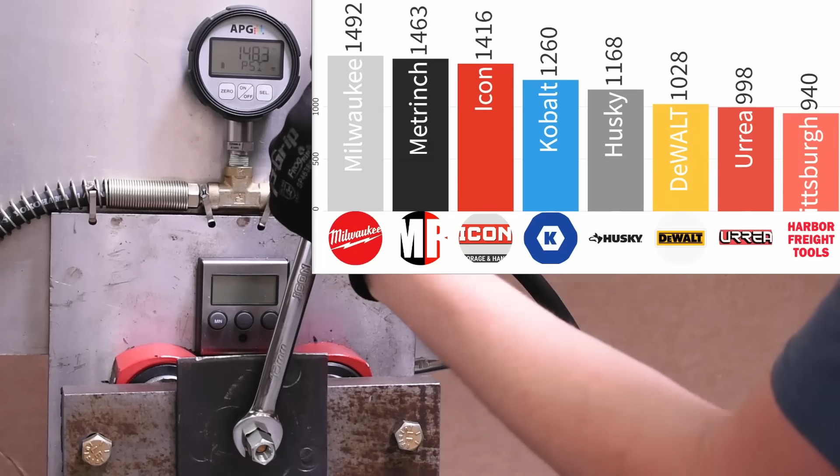Today we test 13 different brands of spanners from Europe versus combo wrenches from the US, from brands we haven't tested yet on the channel. Looking at the amount of grip they can do before slipping, how that performance compares to jaw thickness and hardness, and finally comparing those results against what we've measured from the likes of Snap-on, Harbor Freight Icon, Milwaukee, and more. Trigger warning: I'm not going to be pronouncing half these names correctly, so apologies ahead of time.

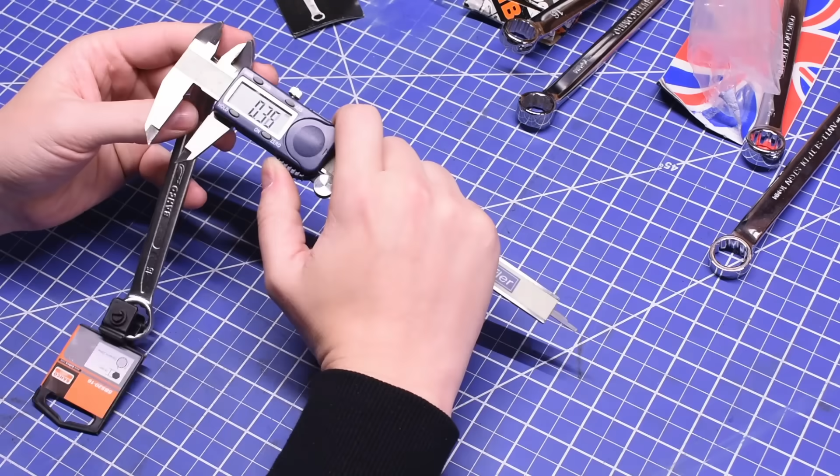In order of price, we found them for, but this likely changes based on the country you're buying in. We have the Bahco CM Set 10 combination wrench set, or spanner set, whichever your preference may be. This wrench comes in a 10-piece set for $75, so $7.50 a piece. Bahco is made in Sweden, and many say it's a cheaper way to buy Snap-on since they're part of the Snap-on umbrella, but this one's opening measures 0.18 millimeters over nominal, so not off to a Snap-on-like start there.

We currently test each wrench more than once in each wrench direction and show you its median result. And we use all new hardware for each test—nuts, washers, bolts, everything.

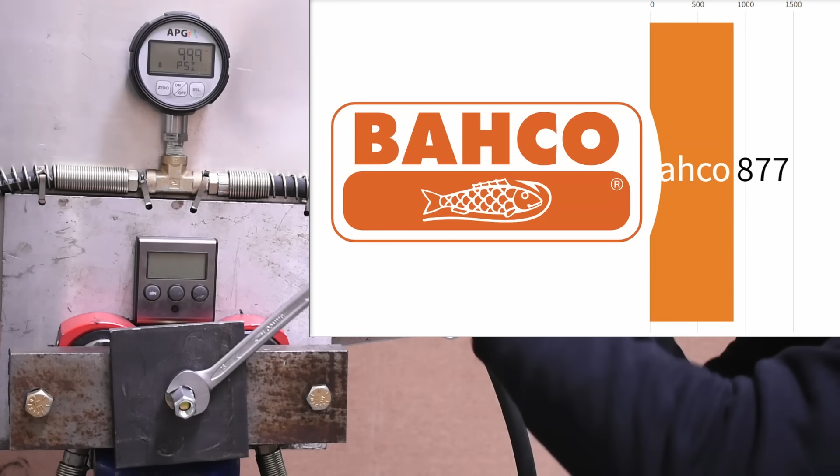This one's jaws measure 6.7 millimeters thick, which is about normal, and it slips and mars the fastener at about 1109 psi of bolt tension, which if you want to play along at home, you can convert to torque using the formula below.

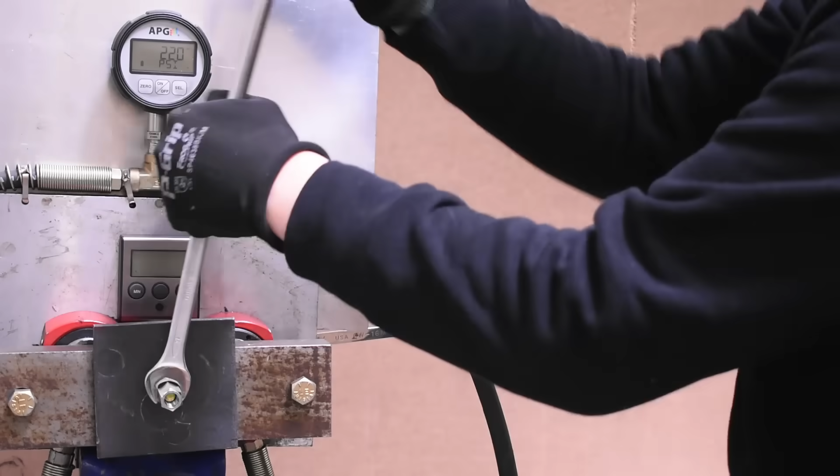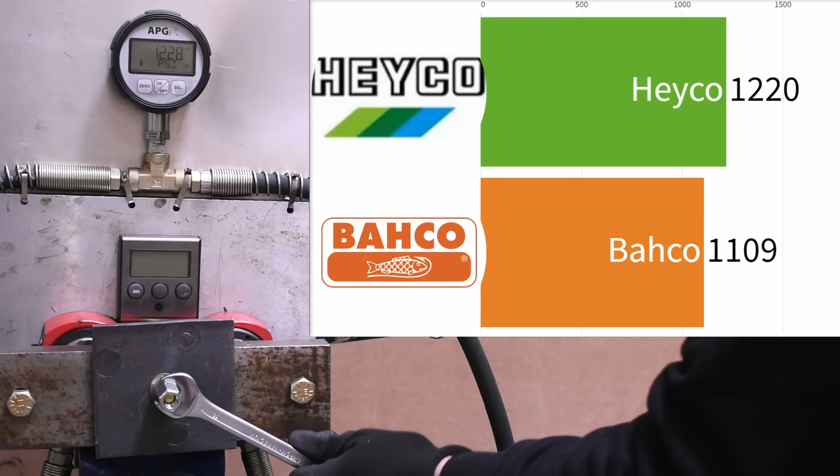Next up in price is the Heyco, the first in a line of German brands we have coming up. This one measures only 0.09 millimeters over what's stamped on the tool, which is a channel record, beating the 0.11 millimeters over of Snap-on. It's tight. But also slender, only 6.25 millimeters thick at the jaws, which we factor into scoring, but may make for a hard go at pumping up the PSI here. But it still passes the Bahco with 1220 nonetheless. Should do very nice in performance per jaw thickness, likely helped by that tight tolerance.

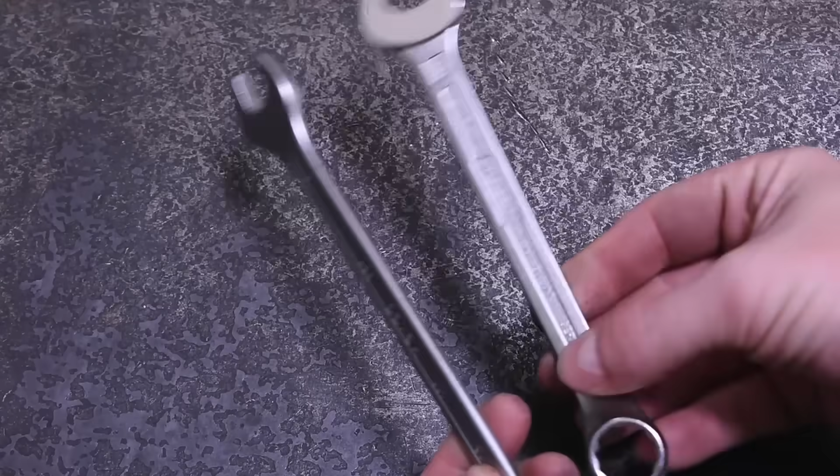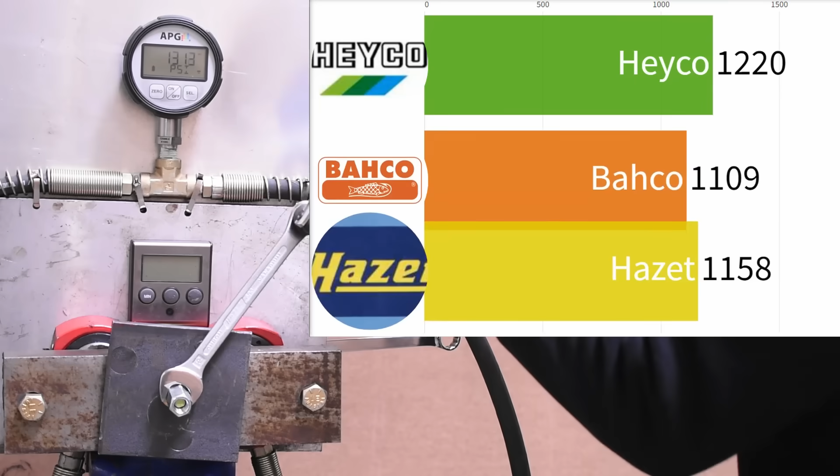Alright, and here we have the Hazet, jumping up from $9 to $10 a wrench now. The German brand Hazet looks very similar to the Heyco, but has this cool offset sort of boxed-in design. The Hazet measures 0.14 millimeters over, which is still quite good—we often see 18s and 20s, for example. Its jaw thickness is 6.5 millimeters, which is on the thin side, but has its benefits. That doesn't stop it from piling on the PSI nicely, and the Hazet reaches up to 1158 before slipping. Very nice.

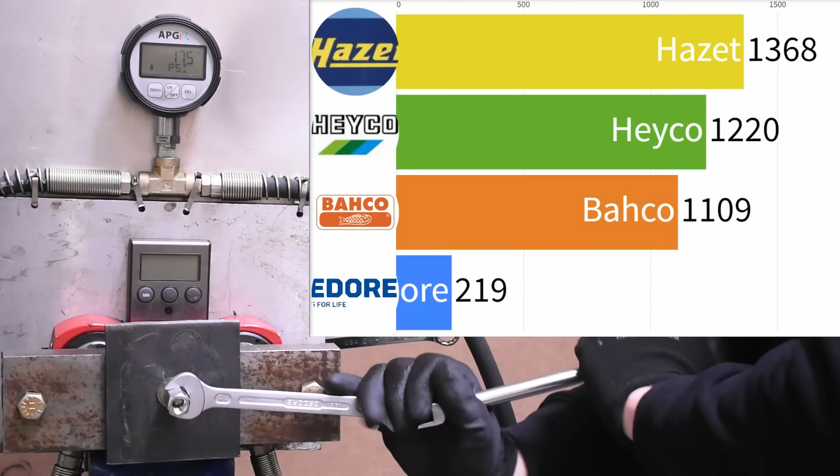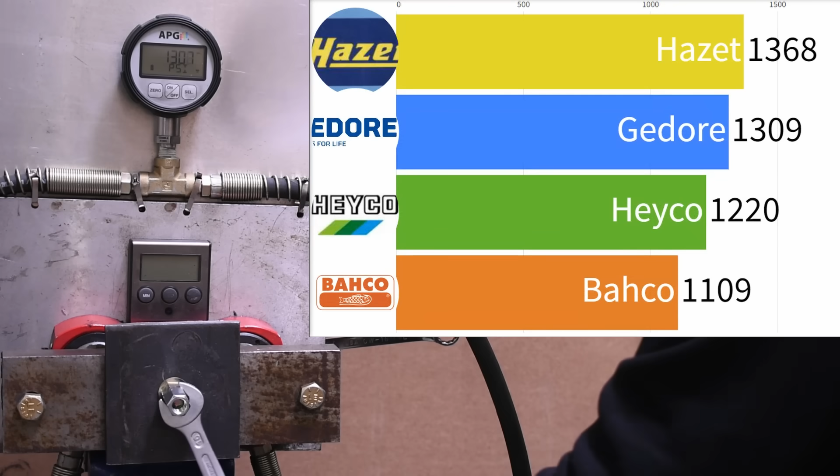And here we have the brand I'm going to call Gedore, another German example, $10.83 a wrench as found. This one's a true spanner, no box end, and rocks that seemingly popular over there sandblasted satin chrome finish. Also 0.14 millimeters over like the Hazet, but 6.3 millimeters thick, which again is on the quite narrow end of things. This one felt very grippy, or sticky depending on how you see it. It wanted to slip but wouldn't let go, and turned things up to 1309 before it did so, earning itself second place at the moment.

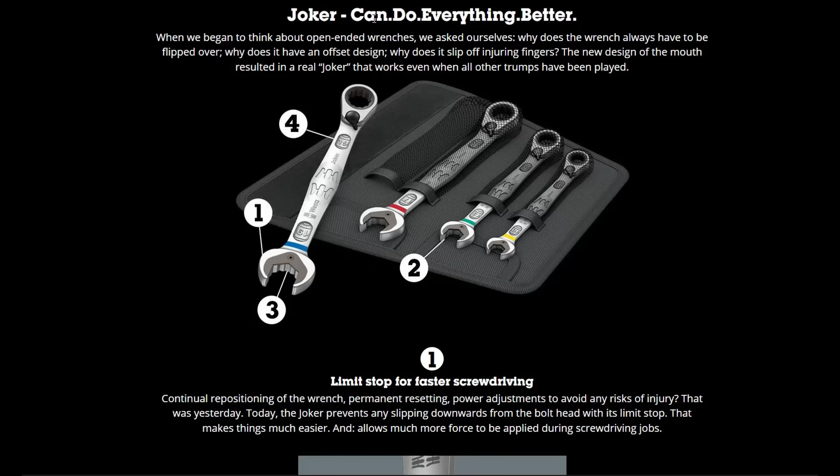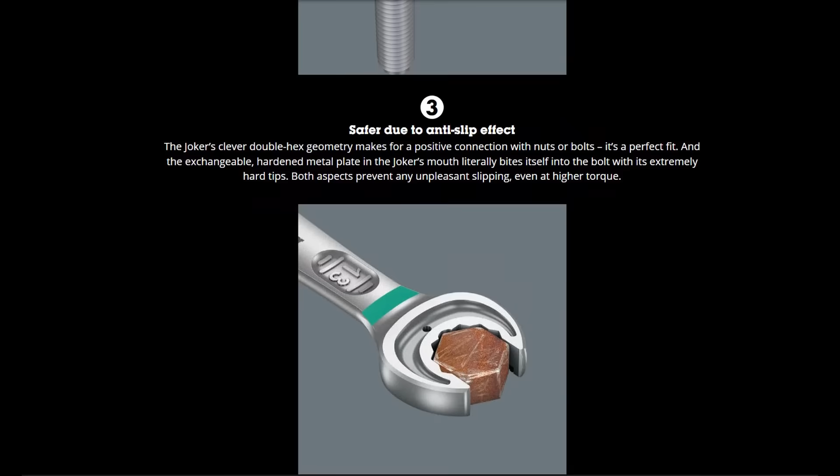And finally on the channel we have a Wera, or Wera. This is the Joker, a highly requested wrench for us to try, and it's certainly different—like a cut-open 12-point box end made into an open end. They make two versions of this: one with an even additional feature, a limit stopper at the top to stay atop a nut as you follow it down. Then this version, without that machined piece into it, which I felt might be thicker and have more purchase on a fastener. As they point out, a 12-point-inspired design only requires 30 degrees of repositioning, or just 15 when you flip it over back and forth. Pretty cool, but does it help it grip?

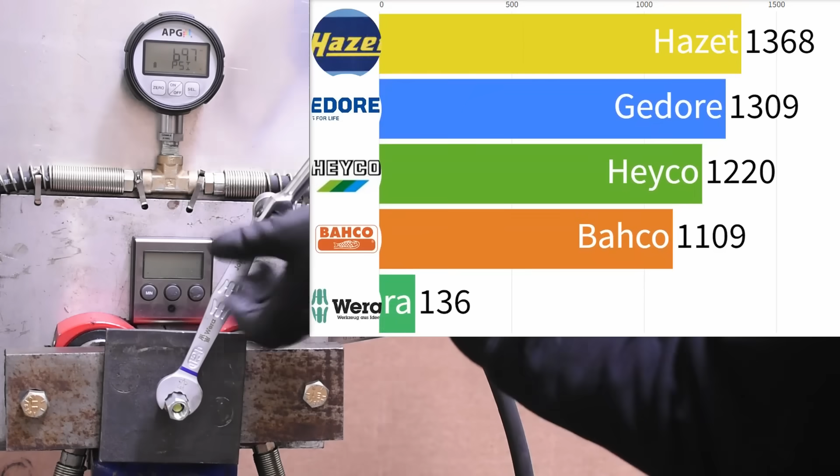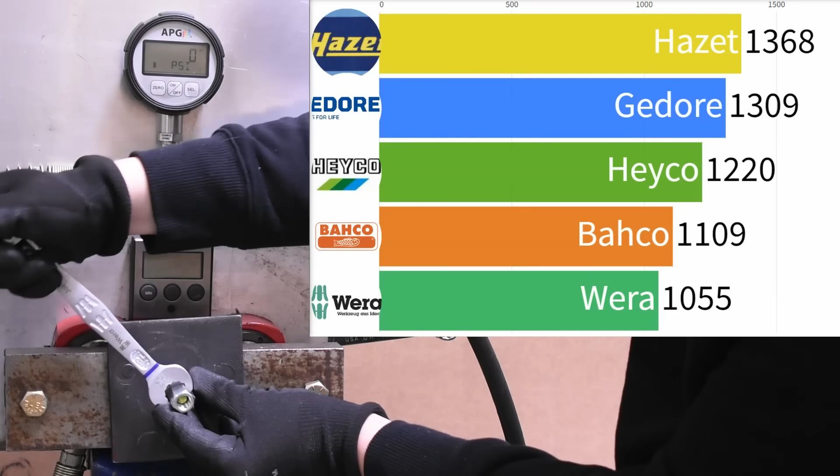We'll have to see. To the best of my ability measuring across the flats on a 12-point design, this one is 0.13 millimeters over, which is very good. And we needed to do 4 tests on this one, both wrench directions and the nut gripped by the jaw flats versus it starting sort of clocked into its corners. The first median result you're seeing here is in the corners, and it reached up to 1055. Not top level stuff here, but that's probably also the least ideal of the holding positions on this.

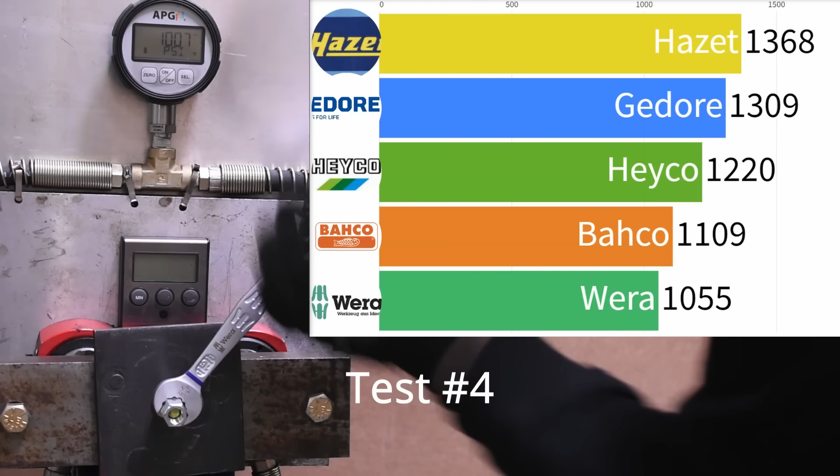We of course also tested 30 degrees over, only using the next set of hex points, and we were able to muster up to 1022—yep, about the same. And this wrench was very consistent, as much as like 1% off of what we're seeing here. Even as a function of its jaw thickness, it's just not great comparing to a normal wrench, as you see up here from the scores of Hazet and Gedore. I personally use this wrench for cramped quarters where a ratcheting design wouldn't work, so maybe not peak torque situations anyways. Do with that information what you will.

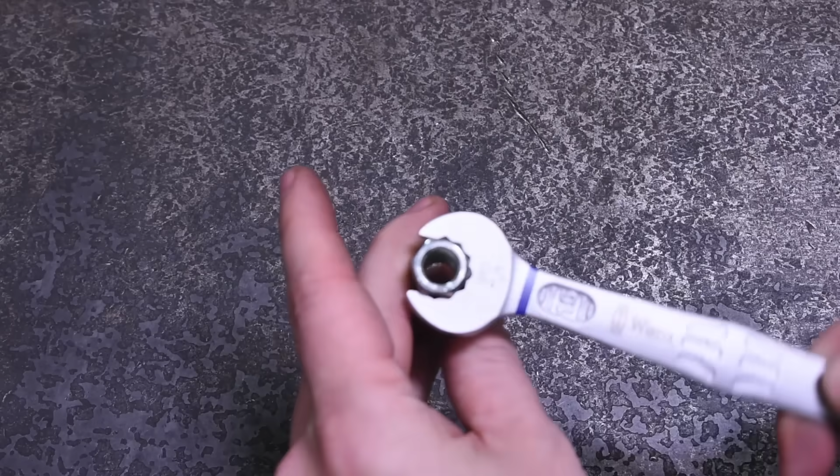Alright, a couple more European examples here before we meet some USA stuff. USA wrenches just seem to cost more, is why. And next up we have the—

Stahlwille. I think it's like Stahlwille.

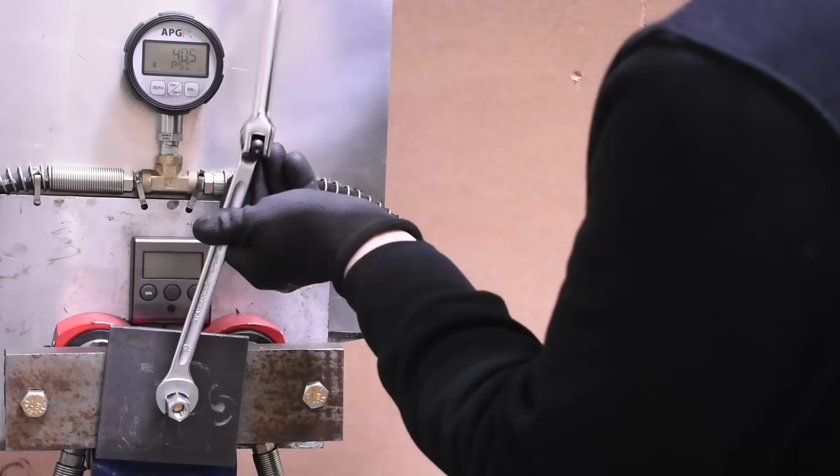A unique looking wrench compared to those thus far: 7mm jaw thickness, 0.13 millimeters over. Nothing wrong with that, but this one will jump scare you. You're just going about your day, then all of a sudden the wrench lurches forward. No idea why. Tested this 3 times, less than 0.5% difference between runs. It did not like being pushed. Maybe we got a lemon.

Beta is up next, an Italian brand. We have 2 examples from Beta today because the first one we ordered, we accidentally got a tappet wrench, which is not a traditional wrench. A tappet wrench is usually a shorter, thinner snugging up wrench, and that's exactly what this is. But it looks cool, so we wanted to include it just because.

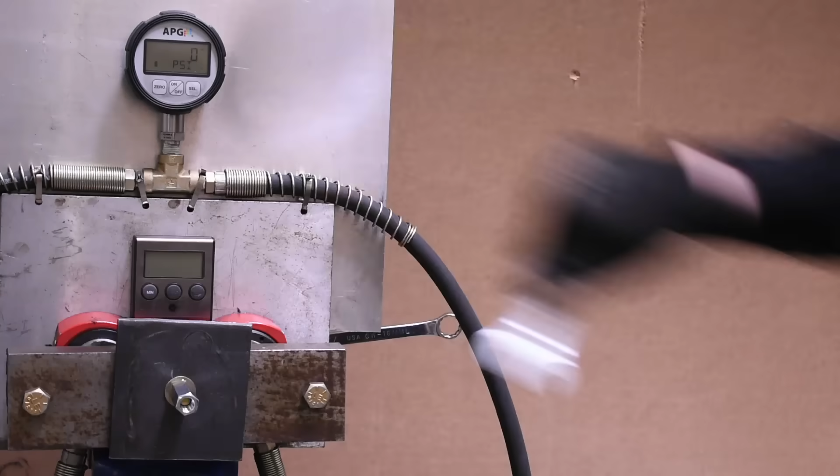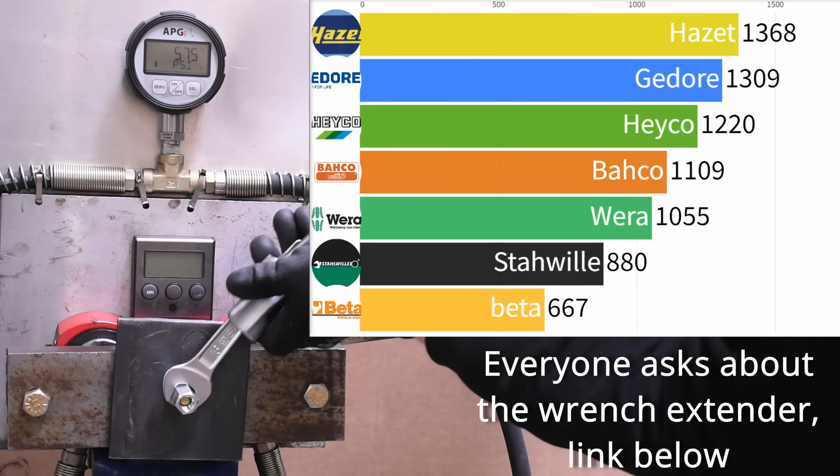The standard wrench looks very American style in its finish and length. It measures 0.13 millimeters over, and 0.11 millimeters over for the tappet wrench. That's very nice. The tappet is up first, and it's a bit awkward to crank on this, understandably, but this thing feels solid. I don't always know what it is, but some wrenches just feel confident while being abused like this, and others feel loosey-goosey.

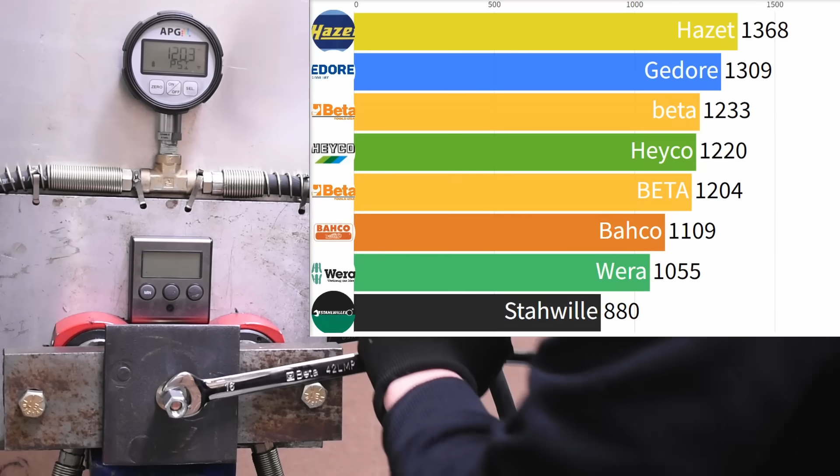This one, despite its narrow jaws, is able to climb up in the points quite well, surprisingly, up to 1233 before slipping. The standard wrench is wider at the jaws, but strangely that didn't help it much, delivering 1208, so less on every test than their tappet wrench.

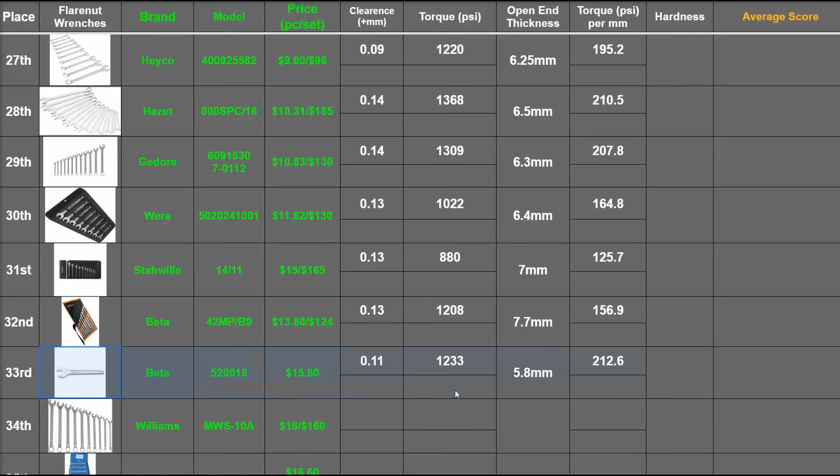If you need a little palm wrench like this, look no further. This little guy is a beast, and you'll never be able to generate enough torque on its length to make it slip. 212 is an overall record on the channel for performance per millimeter of jaw thickness. Pretty sweet.

All right, and finally we have some US entries, because it took this long to get here in pricing. At $160 a set, $16 a wrench, this is the Williams Super Combo. And this is one of the nicer wrenches I've ever held, not because it's US made - it's nicer than some US wrenches we've had on the channel, including Snap-on, who Williams is often making things for, like sockets.

Its thick, bolstered, smooth radius edges give it a nice weight and comfort when cranking on it, and it tapers at the head for more access. I've never seen a Super Combo wrench in person before, so this is just my impression.

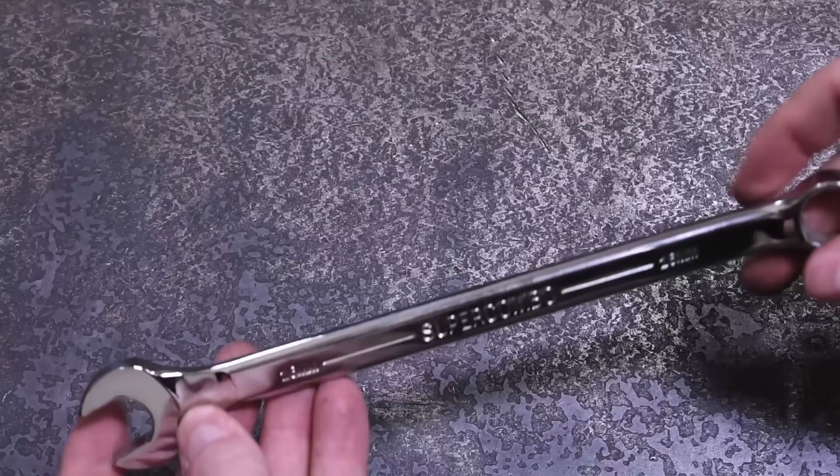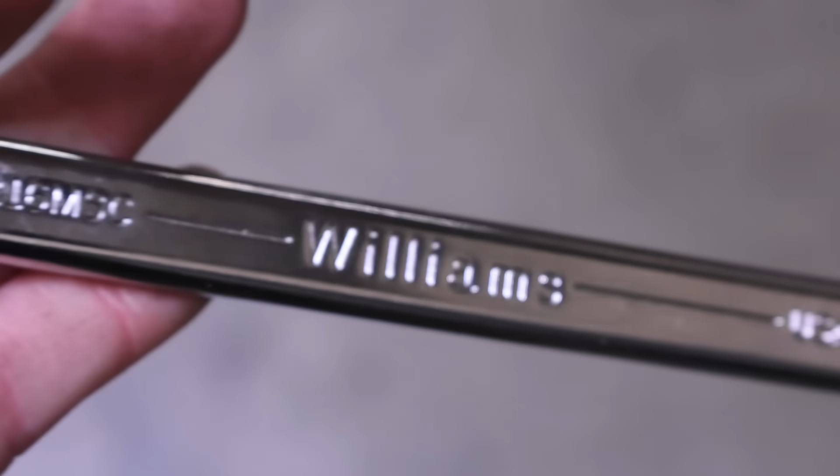By the numbers, the opening measures 0.09 millimeters over, which is a good sign. And that open end is our first specialty non-slip design of the day. Europe doesn't mess around with reinventing the wheel, it seems. It has a couple simple cuts and a radius groove design that, according to them, direct wrench force away from the fastener corners. With 7.6 millimeters in thickness, that should help, which is somewhat typical of US wrenches I find.

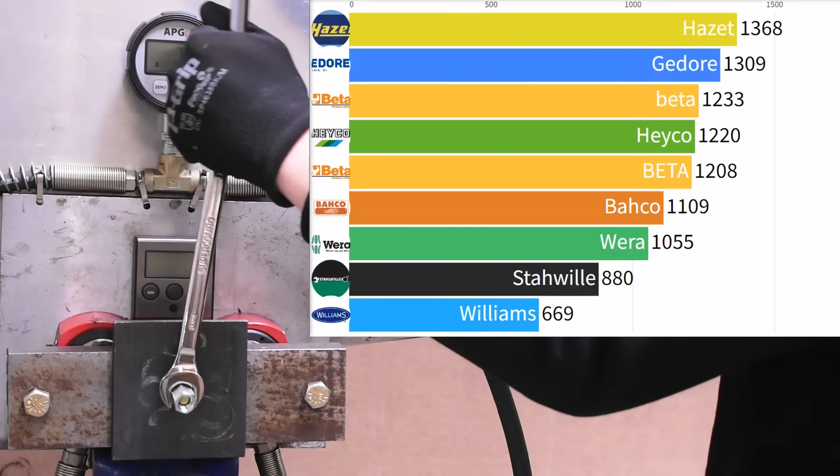And the Super Combo is one of those wrenches that feels planted until you're at the end and you know it's about to go sideways, which is a good thing. Instead of being sudden, you can see it coming. Quite good. Was also expecting more from the several tests we did with this, given what we've seen from non-slip designs in the past.

Okay, next is King Dick. You can't head over to Europe without stopping over in the UK and ordering some King Dick. This one admittedly was much more expensive bought in the US, so it's worth pointing out that as a set it was $16.60 a wrench here, but over there it's much less.

This is another brand suggested often by our viewers, much to the dismay of the comment section language filter. I've actually seen this brand a handful of times here in the States in shops, so it must have a reputation. It measures 0.15 millimeters over, good, and just 6.25 thick, so it's more of a length over girth sort of deal. And when you put it to the task, well, you just gotta watch the King Dick.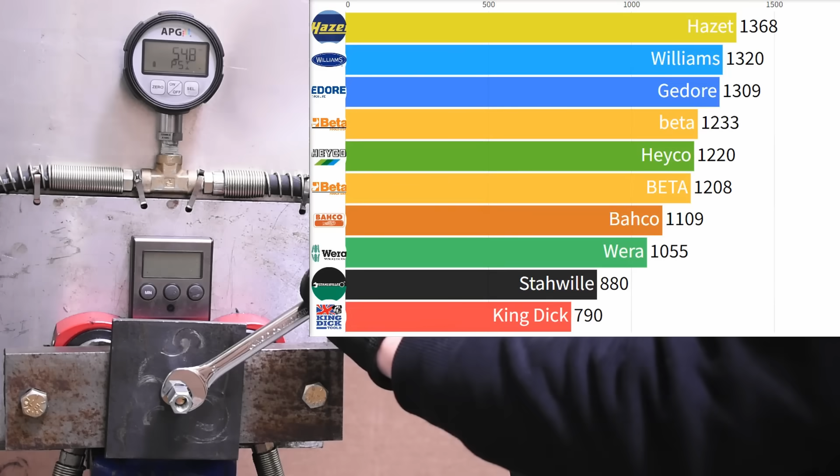That other piece shot off into outer space. I broke my dick. Yep.

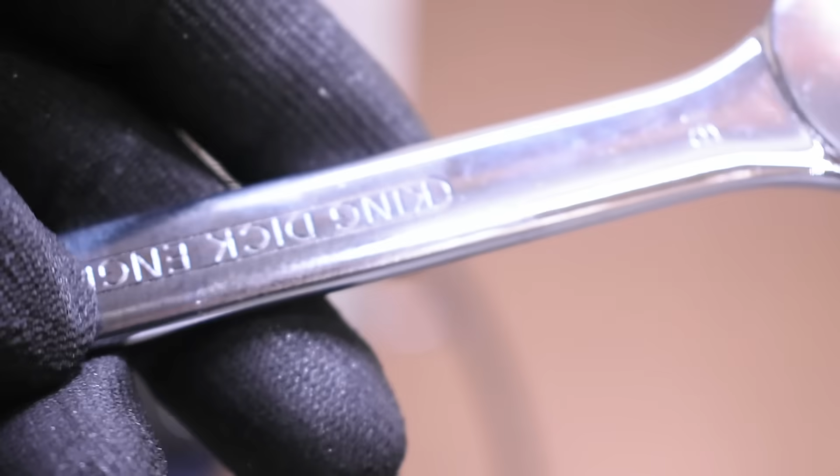Unfortunately, we couldn't do our minimum of 3 tests on this one. This was its first use. In a surprising scenario for us, even the worst wrenches we've tested have never done this. We'll have to see what hardness testing reveals on this one coming up.

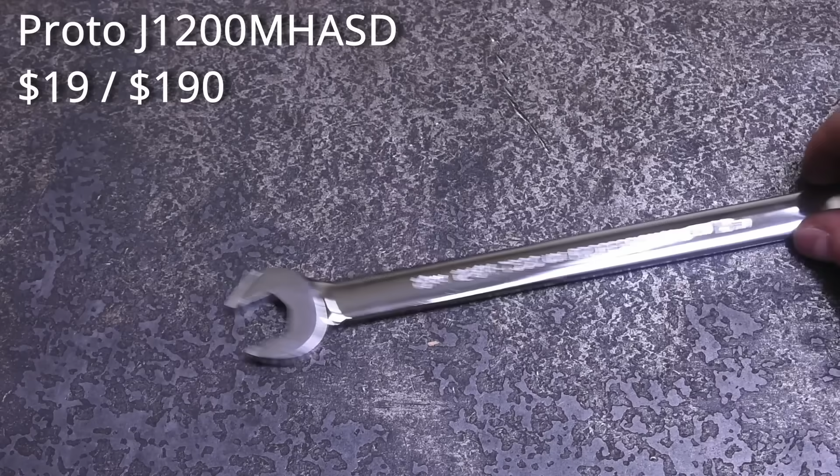And next here we have Proto, $190 a set, $19 a wrench. This is a USA made wrench and features their anti-slip design. Spoiler alert: we've tested a different size of this wrench on rounded stuff on the channel before and found it to be very good.

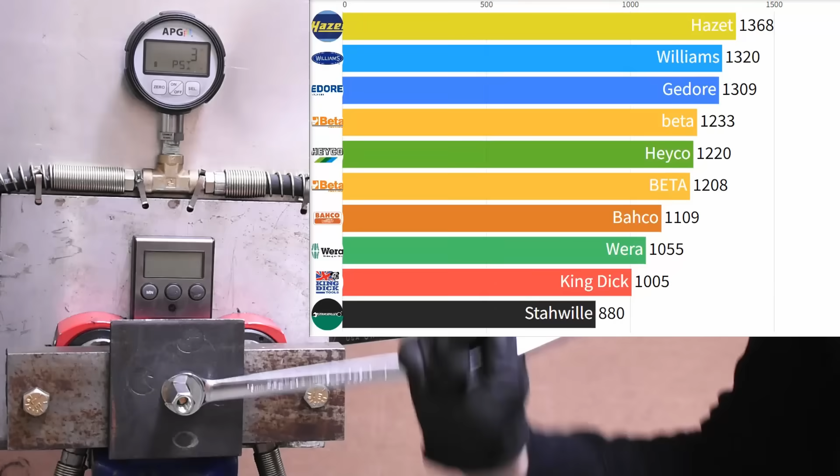But how good compared to the 32 plus brands we've tested so far? Who knows? This design is very similar to the Williams and isn't going to be eating up a bolt head like some of the other shark bite looking jaws that have hit the dyno in the past. It measures 0.10 millimeters over and has an 8 millimeter wide jaw, which is certainly on the wide end for this size. But it uses that size and that anti-slip jaw design to, well, yeah, you guessed it, not slip, and climb up and up and up in bolt tension, just dunking on everything we've tested today so far.

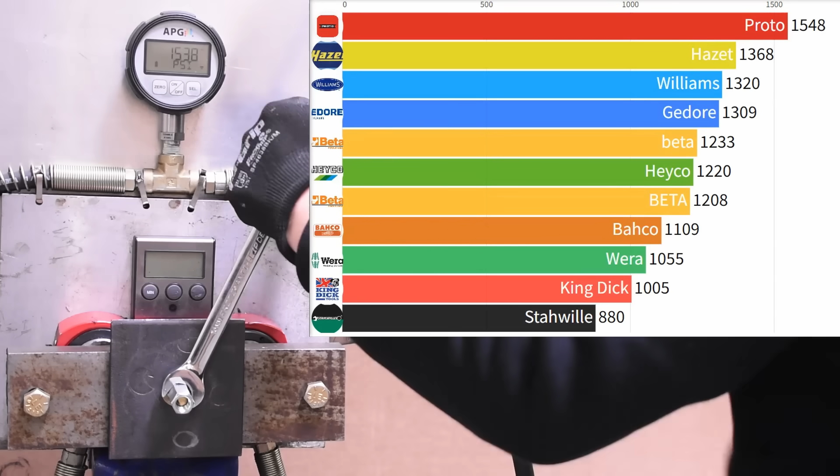This is a median run, but we were able to max out the fastener here and cause it to start collapsing in on itself when run this way, or with the wrench flipped around, though it did reach higher numbers in this orientation for whatever reason. So this moves it into the elite class of wrenches to max out the setup, which includes only one other brand you'll be seeing it ranked against shortly.

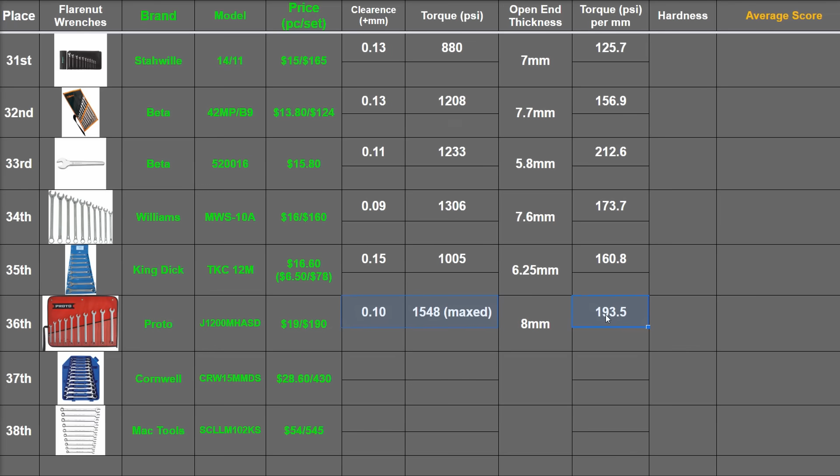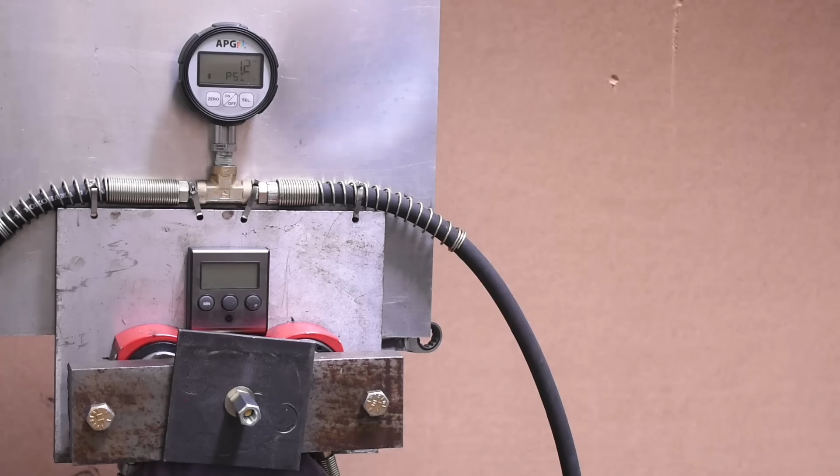Going up in price yet again, we now have Cornwell, which our viewer Anthony sent us two separate examples of: this ratcheting one, because it's an anti-slip design, and this other USA-made one here. Here's the ratcheting anti-slip first, which measured 0.13 millimeters over and is 7.6 millimeters thick.

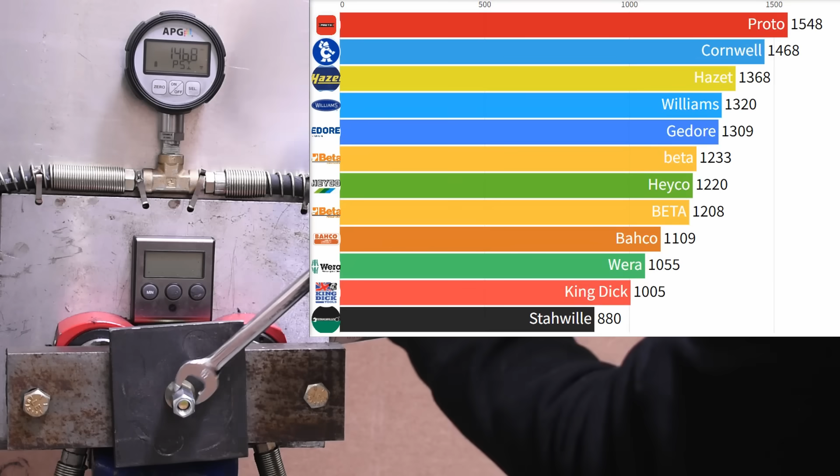This design is very reminiscent of the Snap-on Flank Drive Plus, with cuts and lines on one side and a raised part on the opposing end, and has a similar effect as well, raising up into the ranks, very close to the 1492 the Snap-on made in our first episode, with 1468 here. Very good.

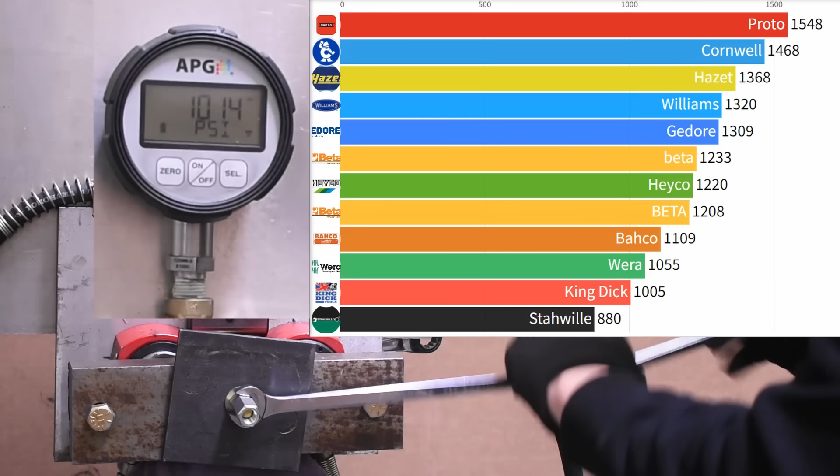The USA-made wrench from Cornwell uses the hex throat design we're not a big fan of, and we contend it perhaps does nothing. While dimensionally it's good, with 0.13 millimeters over and 7.7 millimeters thick, it doesn't excel in either direction we used it in, making 1015 to 1045 in testing both directions. Not great. Anthony wanted us to include both to perhaps encourage Cornwell to improve this one, so here you are.

Okay, and last, I promise, no more after this, we have the Mac Tools Knuckle Saver, a USA-made wrench with a long history of not sucking, and they're proud of it too, it seems, as they currently sell for $54 a wrench, $545 a set. That's more than the Snap-on and Snap-on FD Plus.

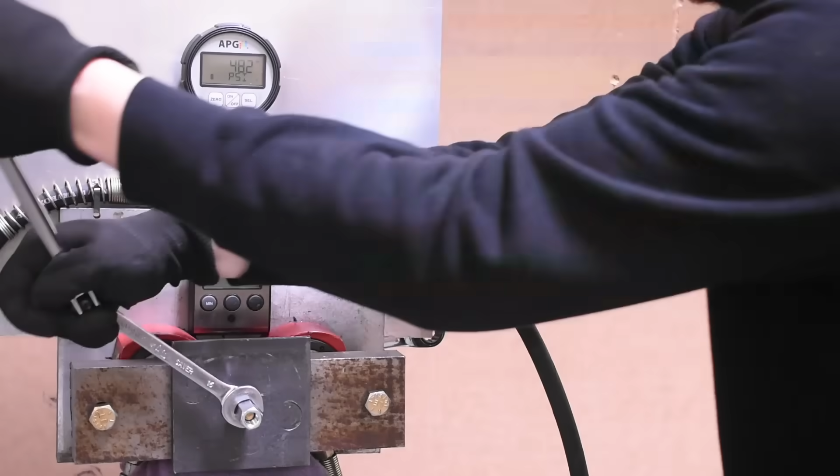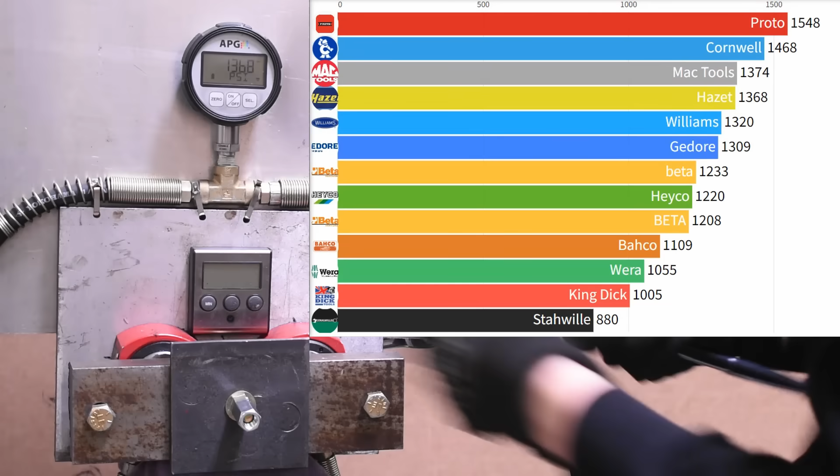Tight tolerance, 0.12 millimeters over, 7.4 millimeter jaw thickness, and this one does well, making it up to 1,374 in this direction, 1,420 in the other direction, but in its 5 tests, the one you're seeing here is a median. Very nice. It appears Mac Tools has an RBRT wrench possibly coming out soon, named after their rounded bolt extractor line, so curious to see how that one does versus this one, if we can get our hands on it.

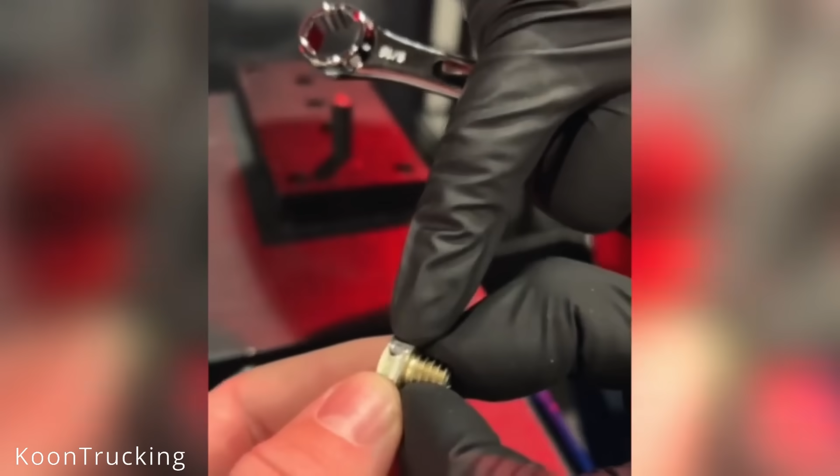Okay, on to scoring and hardness. We're not going to have you sit through all the testing of these wrenches and hardness after the chrome was removed, so here's all of those. Typical hardness for wrenches we've tested on the channel is about 47 Rockwell. So the standouts here are Gedore, which is too soft, even compared to the ANSI standard we use here in the States, so it might not pass inspection here.

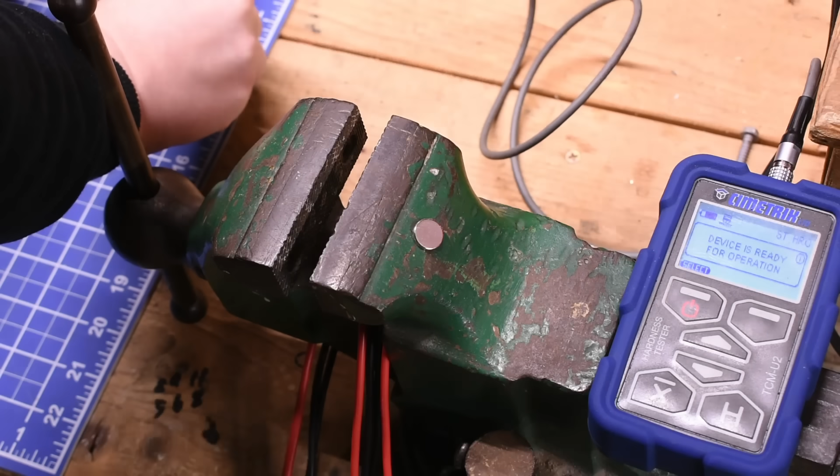And this one, yes, the King Dick is hard, and not in a good way. You can get away with this sort of hardness measurement if your wrench is thick, but thin and hard is doing no one any good, as it called it quits before things really even got started.

Here's scoring for wrench tolerance, and we have to add some rare 11 out of 10 scores here for doing better than any other previous wrench that had already earned a 10. In general, these European brands are tighter clearance than the US or Asian sources. US wrenches have been good too, and they beat Taiwan and other Asian sources on average. Without specialty jaws, it seems, Europe is not as high in the twisty torque.

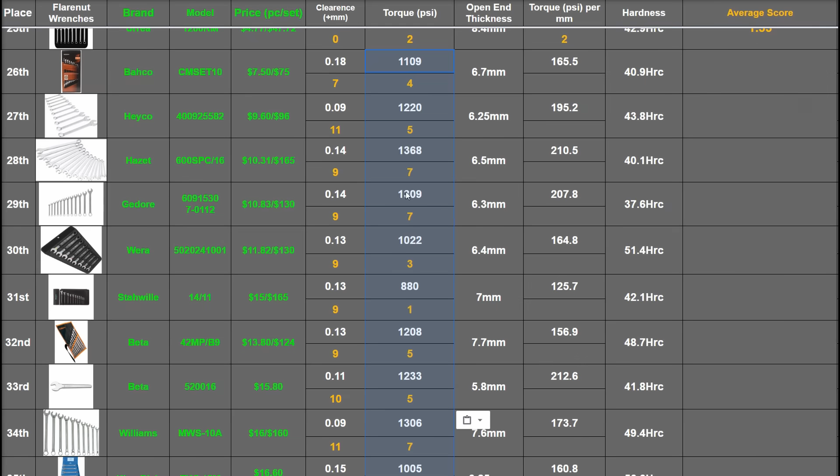This is what that scoring looks like. The Stahlwille gets a 1 for obvious reasons. The Hazet did quite well, and the more expensive wrenches down here, they did well too, as you'd hope, as a function of their performance and jaw thickness. Europe again did very well, being slimmer than most, but in some cases still doing well despite that.

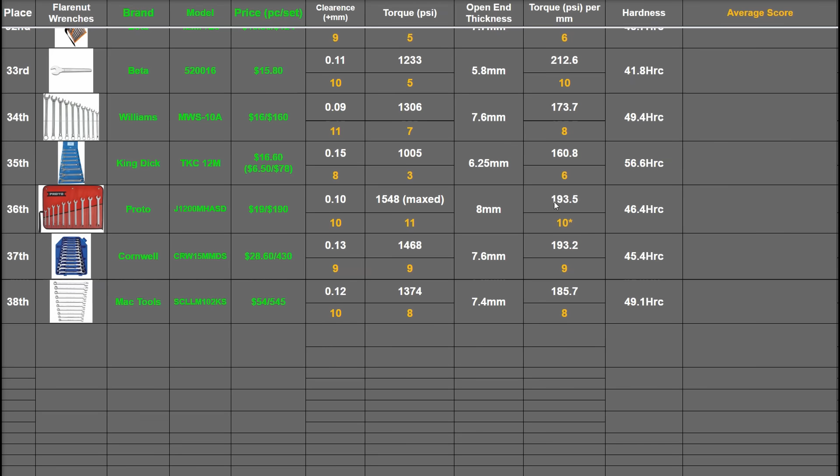Gedore, Hazet, Beta. Proto gets an 11 here for scoring a 10 by the points, but maxing out the rig, so getting a bonus since it didn't really meet its maximum. And this is how the points average out.

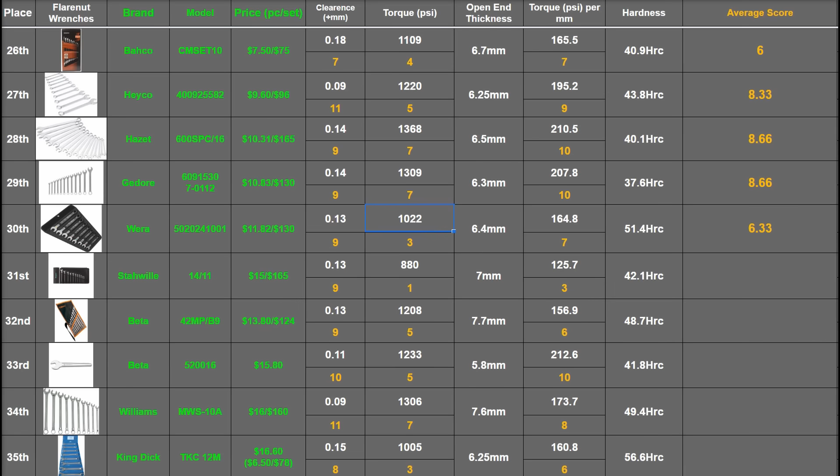6 points for the Bahco, 8.33 for Heyco, 8.66 for Hazet, 8.66 for Gedore, 6.33 for the Wera Joker that didn't really like our nonsense, then 4.33, 6.66, 8.33, 8.66, 5.66 for the King Dick, 10.33, 9, and 8.66, putting the Proto anti-slip at the top of everything we've ever tested.

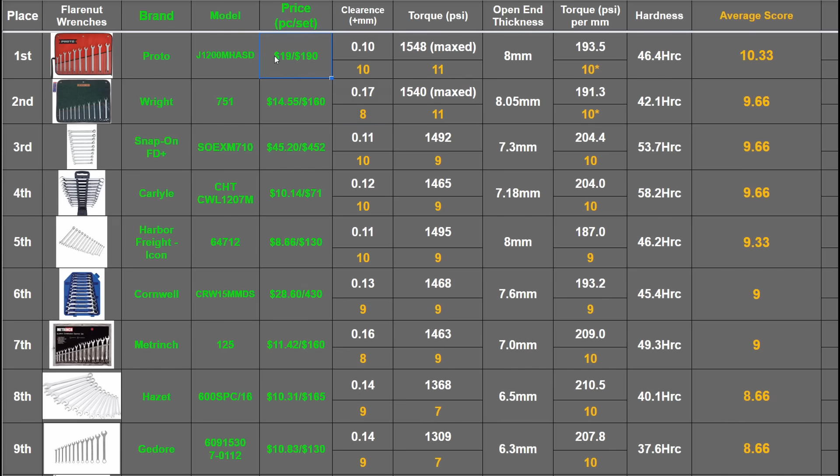Beating the Wright Grip 2.0 purely on bolt clearance, admittedly, though it is a little bit more costly. I feel they can be found a lot easier too. Check the links below. Very nice.

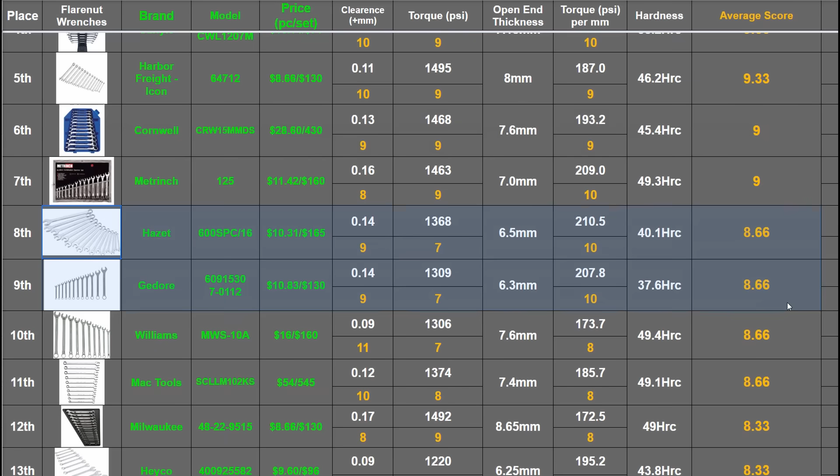The Cornwell placed well here, and this is how these placed compared to the Snap-on and Icon over here. Williams as well, those are super nice in person I feel, and some well-placing European examples too, beating the Milwaukee and Matco specialty jaws along the way.

Considering this and this, I'm going to have to hand it to the US brands on this one, though you'll have to pay for that privilege, as these things aren't cheap, even compared to buying European spanners in the United States.